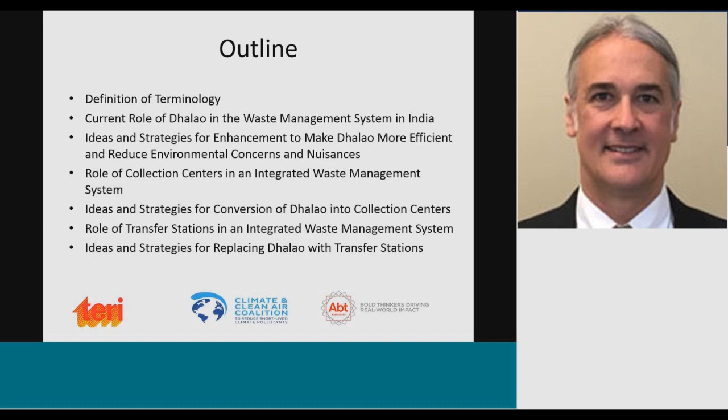I wanted to start by defining some terminology so we're all understanding how I'm using these terms today. A Dhalao is any form of a three-walled bay or bunker or building structure, typically constructed of concrete or block, and it's utilized for the collection and aggregation of solid waste from residential and commercial waste generators. Typically, the waste is tipped at the Dhalao manually by a municipal waste collector or cleaning staff, Safai Karamchari, and the Dhalaos are typically not equipped with any container.

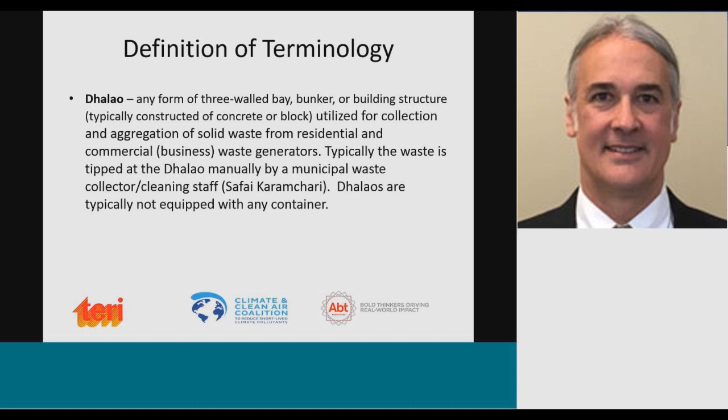A collection center is a facility established for collecting solid waste and recyclable materials from residents, and in some cases small businesses or institutions. This is a facility where individual residents can dispose of waste in bulk storage containers, and they're serviced by collection vehicles. A collection center typically does not allow commercial waste, and it does not have waste collection vehicles tipping waste there.

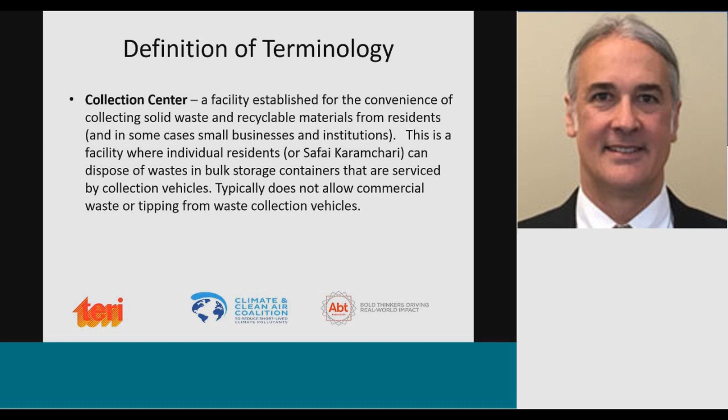And finally, to define a transfer station: it's any solid waste storage or collection facility at which the solid waste is transferred from collection vehicles to containers or larger long-haul vehicles for transportation to a central solid waste management facility for disposal, incineration, or resource recovery. Typically, transfer stations don't allow for manual tipping of waste, and they're not used by individual residents or businesses.

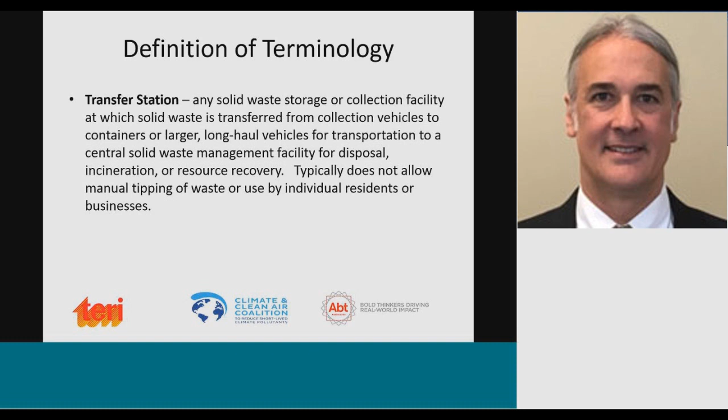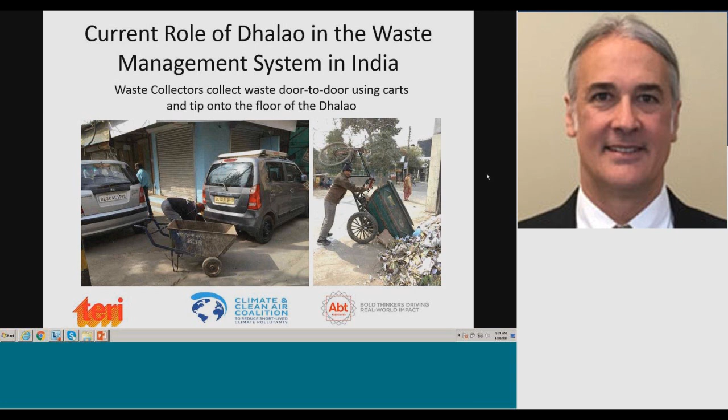The current role of the Dhalaos in the waste management system in India: waste collectors collect the waste door to door using carts of various shapes and sizes, and they tip onto the floor of the Dhalao. The waste is aggregated from local neighborhoods and surrounding communities, and the conditions at the Dhalaos involve tipping solid waste directly onto the floor within the Dhalao and in front of it for collection.

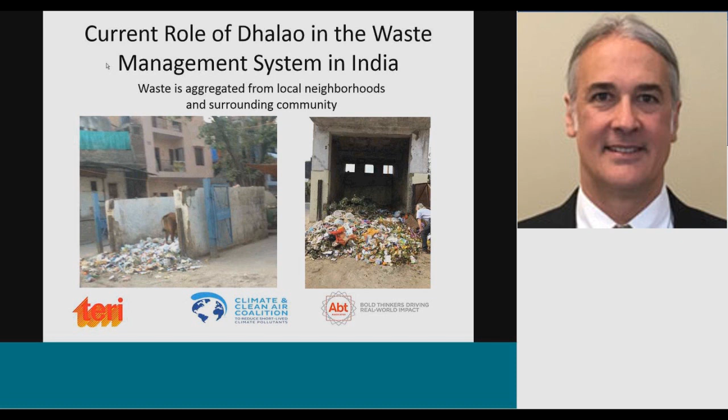Servicing the Dhalao requires a front loader and dump truck to extract the waste from the floor. This is an intensive process requiring multiple manpower and equipment to pick up the solid waste from within and surrounding the Dhalao by the front loader and place it into the truck for transport to the disposal facility.

The challenges with the current role of the Dhalao are inefficient handling of the waste multiple times. It generally has a relatively small storage capacity, and the waste is not containerized. It contributes to traffic congestion and unsafe conditions during servicing, and has to be serviced frequently throughout the day as the Safai Karamchari, the waste collectors, continue bringing waste to the Dhalao. There are nuisance concerns, odors, appearances, livestock and animals getting into the trash, and potential environmental and health concerns.

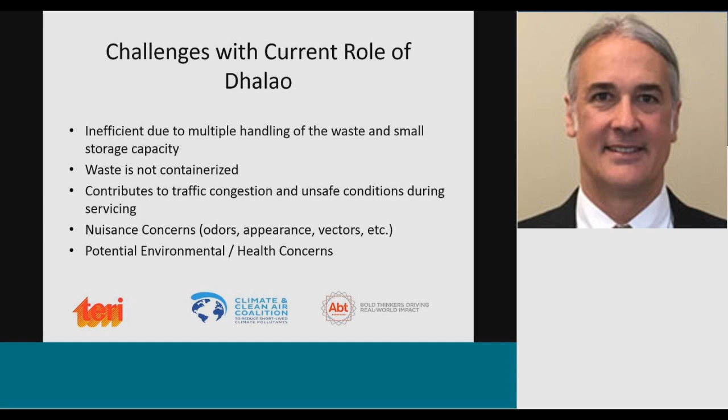Let's talk about a potential solution for enhancing the existing Dhalao structure. If you are limited to your existing Dhalao and cannot expand for another type of facility, one idea is to insert a roll-off container into the Dhalao. The Dhalao comes in many different shapes and sizes; sometimes they're covered, and most of the time they have at least 3 walls.

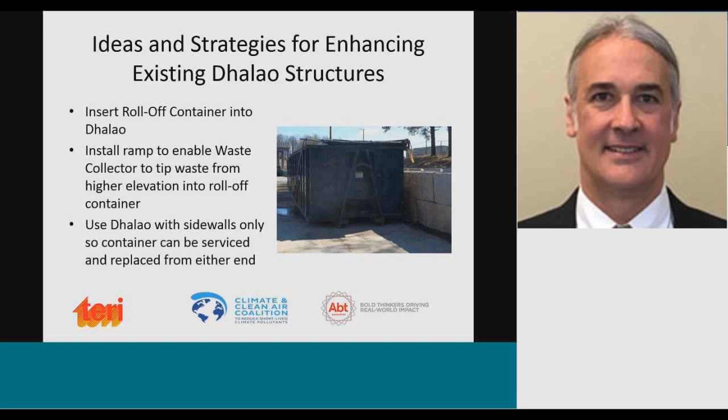Another idea is to install a ramp. In this photo, a block wall has been used to build up the elevation on the side of this container, and you can install a ramp to enable waste collectors to tip waste from their carts at a higher elevation into the roll-off container. You can use a Dhalao with sidewalls only so that containers can be serviced and replaced from either end. It's important to get the waste containerized in the Dhalao, which makes servicing more efficient because a roll-off truck can come and bring the container to the disposal facility and replace it with an empty one.

Along this same line of strategies, you can insert an actual compactor and associated container into the Dhalao. This requires electrical service to be provided, but it enables a more efficient operation. In this situation, the compactor is stationary, remains permanently at the Dhalao, and compacts the waste.

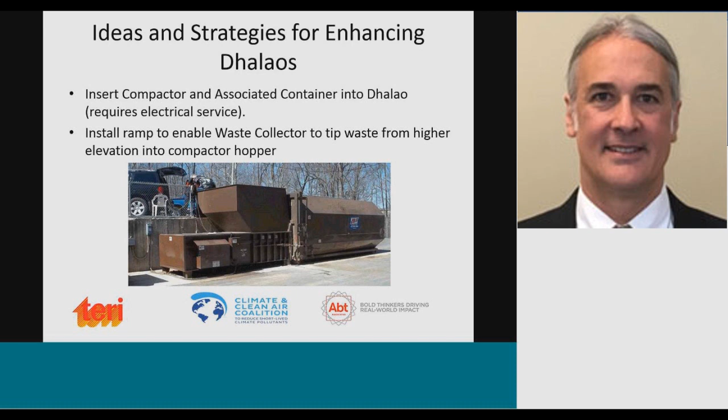This picture shows an example of a top-loading hopper, so you need a ramp to enable the waste collector, or perhaps individual residents and businesses, to place their waste from a higher elevation. If you cannot construct a ramp to achieve tipping into the hopper from a higher elevation, you can utilize an on-grade hopper for the compactor, so a retaining wall or any type of ramp is not necessary.

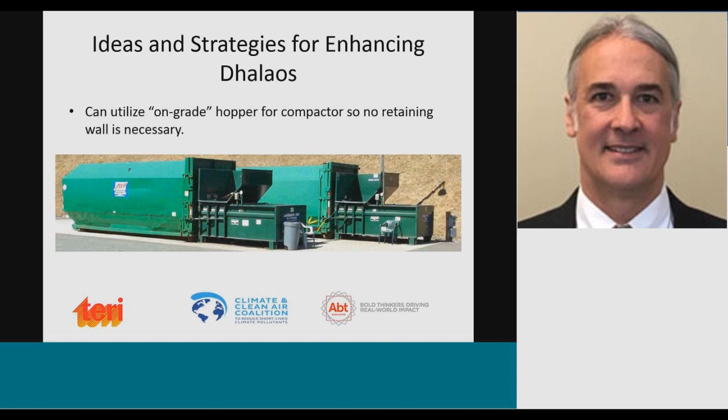I believe this improves waste collection efficiency from an enhanced Dhalao. It eliminates multiple handling of the waste and increases storage capacity to reduce the frequency of servicing. One of the primary goals achieved is that the waste is containerized early in the process of collecting and transporting it to the disposal facility. Clearly, you've reduced the manpower and equipment during servicing.

You no longer need a front end loader, and a single truck driver can operate the roll-off truck to remove and replace the containers or roll-off bins. You reduce traffic congestion and improve safety during servicing, and decrease nuisance concerns. The Dhalao doesn't have as much aesthetic problems, and it decreases potential environmental and health concerns. So that's a situation where if you are limited on space and must utilize the Dhalao, you can enhance it to make these improvements.

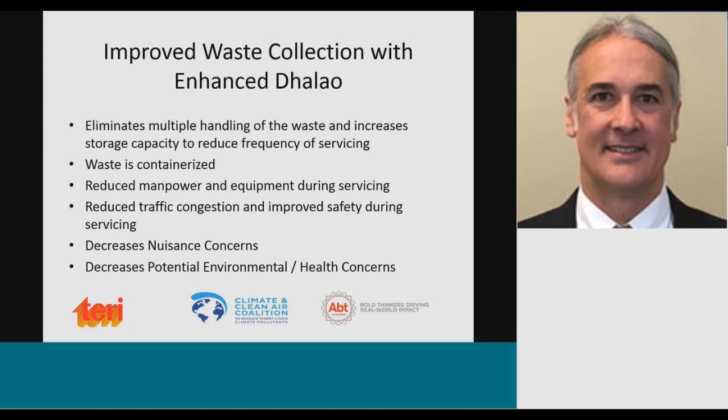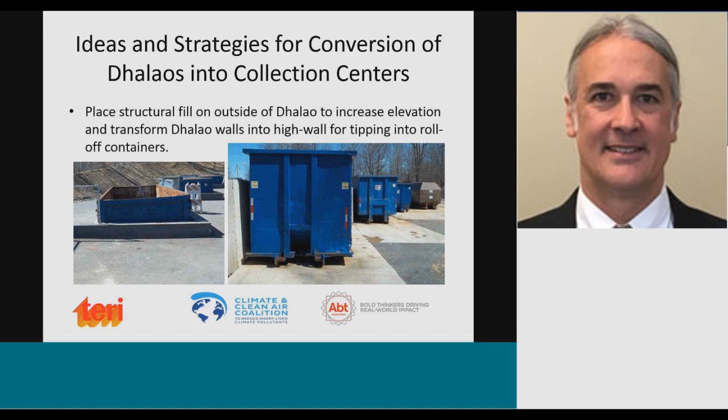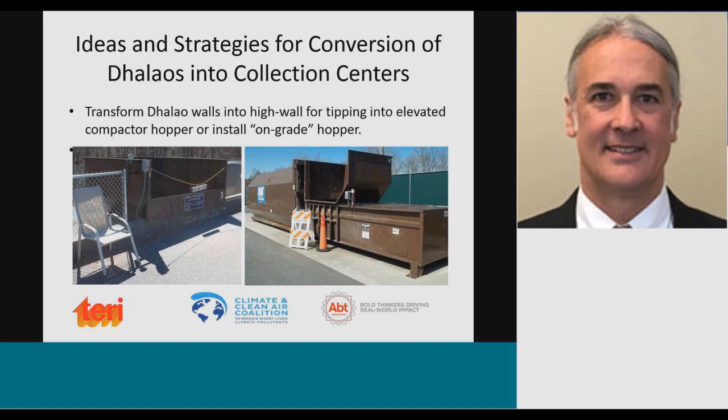Another benefit of the collection centers model is that you can introduce containers for recyclable materials where adequate space is available. I recognize, having observed many of these Dhalaos, that oftentimes there's not substantial space—they're positioned within the urban centers of cities and megacities. But anytime you can get a container allowing segregation of recyclable materials, it would be beneficial to divert these materials from going to the landfill or other disposal facility.

Ideally, the collection center site would measure about a quarter to half a hectare and would have electric service in order to utilize these compactors.

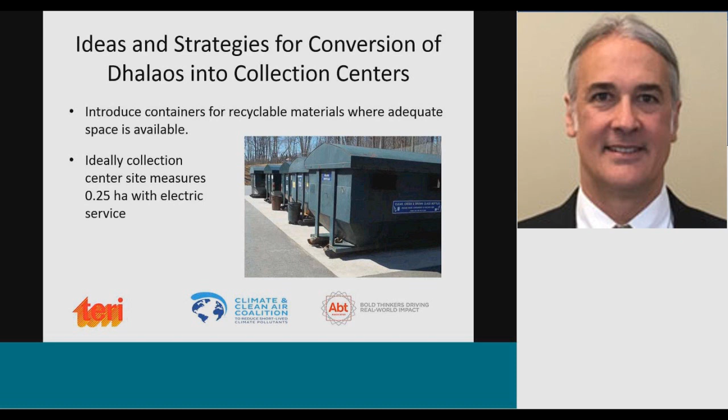The advantages of improving waste collection efficiency and introducing recycling with the collection center model are the same benefits as the enhanced Dhalao. It eliminates multiple handling of waste, which typically happens with the Dhalao type of structure, and it increases storage capacity to reduce the frequency of servicing. The waste is containerized—that's important. It reduces manpower and equipment during servicing, which doesn't happen as frequently. It eliminates nuisance concerns and potential environmental and health concerns, like runoff or releases of solid waste. And the collection center model allows for separation of recyclable materials.

Finally, let's talk a little about the role of transfer stations in the integrated waste management system. My definition of a transfer station is typically where you're transferring waste from either small containers or actual vehicles, the collection vehicles, to larger containers and vehicles, in order to make transportation more efficient with the largest vehicle possible.

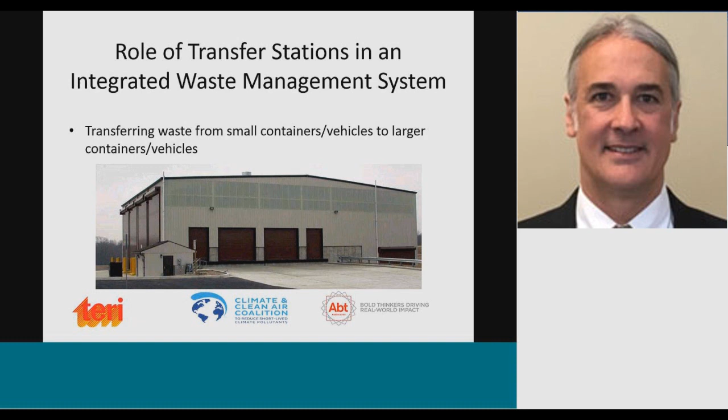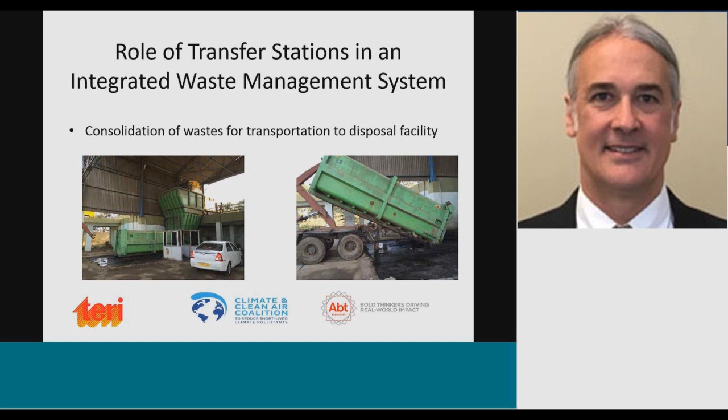Scientific transfer stations in India are being utilized in many communities, basically for the consolidation of waste for transportation to the disposal facility. Here you see a transfer station where the hopper is top loading, so there's an elevation difference where collection vehicles tip waste into a hopper and a compactor. On the left, the compactor container is in place and connected to the hopper. On the right, you see the roll-off truck servicing the container by removing it and transporting it to the disposal facility, where it'll be replaced with an empty container.

Another type of transfer station is where the tipping of waste actually happens within the transfer station building. This type of operation has push walls so that equipment, like a front end loader or backhoe type piece of equipment, takes the waste and places it in a transfer trailer. That transfer trailer is in a tunnel at a different elevation than the collection vehicles that tip waste onto the tipping floor, as you can see in this photo.

Some of the ideas and strategies for replacing the Dhalao with a scientific transfer station in your integrated waste management system. Obviously, transfer stations require more area. The site has to be larger than the very small footprint of the typical Dhalao. So one of the first things you have to do with this strategy is collect the waste from residential units and businesses in containers.

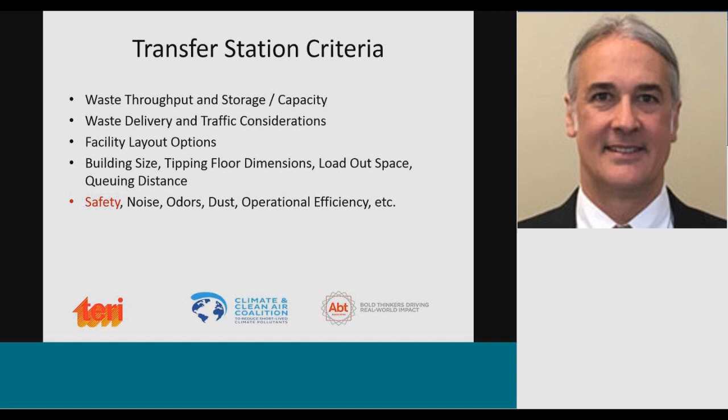Operational parameters of these facilities include safety, noise, odors, dust, and operational efficiency.

Some structural characteristics to consider are the tipping floor, your push walls, and the manner of design of the transfer trailer tunnel. Transfer stations can use a partial tunnel, in which the front end loader has to reach up and place the waste into the top, or a full tunnel depth, where it's more efficient for just pushing the waste in. This depends on your site-specific design parameters.

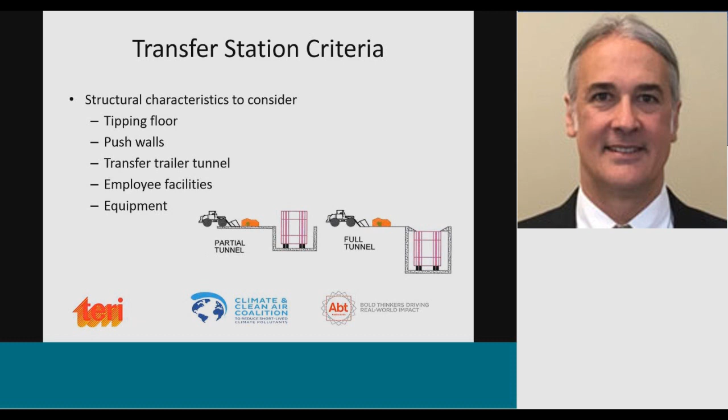Some transfer station design goals we typically attempt to achieve include counterclockwise traffic flow, one-way traffic movements. You want to minimize cross traffic, and you want to segregate your commercial haulers from self haulers that are coming with smaller loads of waste.

If you can separate the large vehicles from the small ones early on in the facility, that works better. You need to accommodate for vehicle staging, have your site amenities, and at all times be thinking about safety and efficiency.

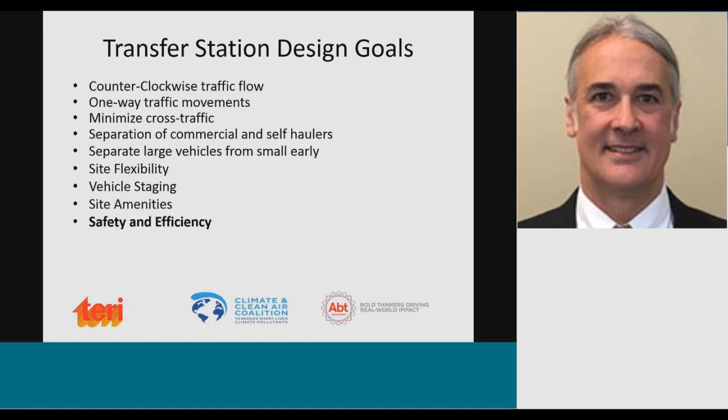In a typical transfer station design, the collection vehicles with containers or the rear loaders are brought in on this path in order to tip the waste onto the tipping floor inside the transfer station.

The vehicles that service the containers and remove the waste from the facility are on a separate roadway, a different path. Then you have space for additional trailers or containers to be placed and stored on the site, and adequate parking for vehicles bringing the waste in.

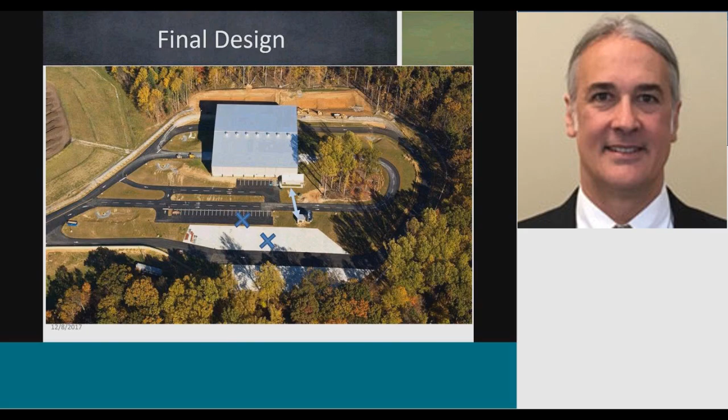Good afternoon, it's a pleasure to be here. I've tried to make it in a simple manner, although apparently it appears to be very simple. But if you actually have to do this, it's going to be a very, very difficult task. In our actual situation, because we have a lot of congestion in our cities, road access is also a difficult issue.

So let me move on with my presentation. I've tried to describe the actual situation here and what should have been as per our rules — what is the ground reality for the Dhalaos or collection centers vis-à-vis the transfer station, which even now is a very loosely termed topic, because we have very few properly designed, so-called modern transfer stations. There are others called transfer stations, but if you go there, you will find it's only an open field where the thing is actually being done.

Coming to my presentation, ideally solid waste should be collected from the point of generation in three different streams, as per our rules, and taken to the respective processing, recycling, or disposal site, excluding construction and demolition waste. This is as per the Solid Waste Management Rules 2016, notified by our Ministry of Environment, Forest and Climate Change last year.

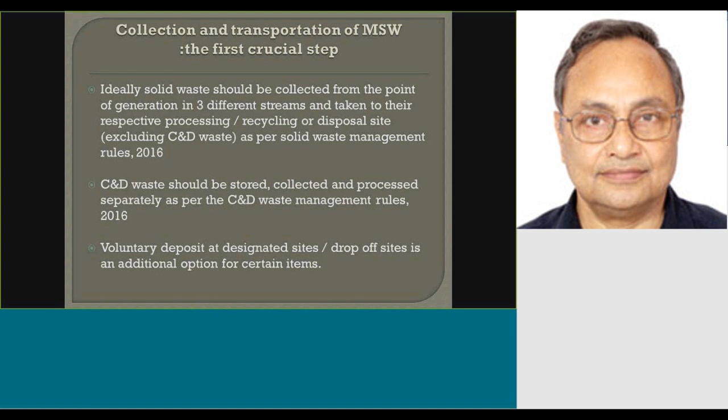Voluntary deposit at designated sites or drop-off sites is an additional option for certain items. This is what should be done ideally, with respect to Indian towns and cities. Now what is the reality? What actually happens at most places is quite different, and often not efficient or desirable.

Mixed waste is thrown or deposited in and around municipal bins at best, or thrown inside a drain at its worst. So you can imagine, if it is thrown inside a bin, we think that is the best option as such. That's the kind of scenario that we have.

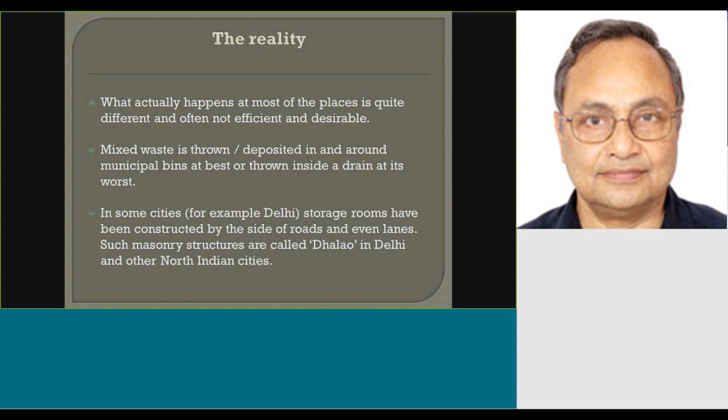Now in some cities, for example Delhi, storage rooms have been constructed by the side of roads and even lanes. Such masonry structures are called Dhalao in Delhi and other North Indian cities. That has become a very common term in this part of the country. The Dhalao, or intermediate neighborhood storage facility, is a common feature of municipal solid waste storage and secondary collection. This is a very common thing ingrained in our waste management life as such.

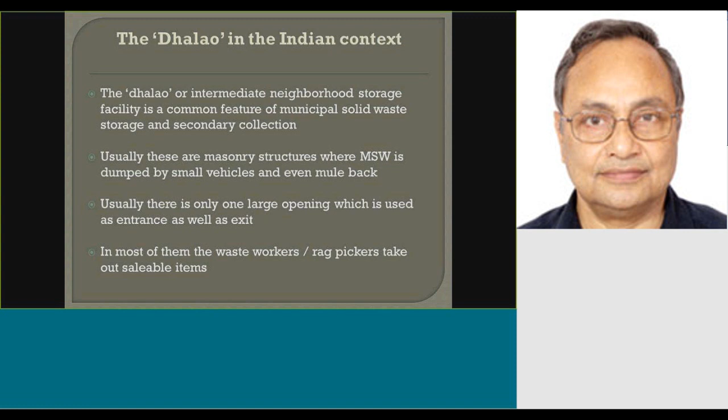In most of them, the waste workers or rag pickers take out the saleable items, depending on what they deal with, taking their share. And the remaining waste matter is picked up by the municipal vehicles and carried to the processing or disposal facility.

In most cases, this is the dump site. In some cases, the material is taken to an intermediate transfer station, which may even be an open ground, as I was just mentioning. Thus, the Dhalao also represents a case of multiple handling of waste.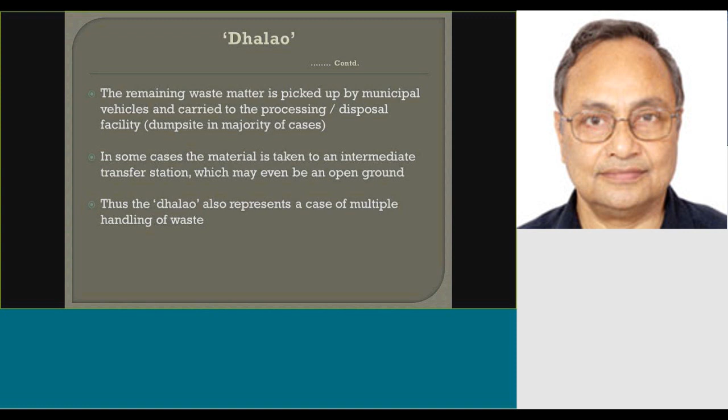Now, just to give a glimpse of the primary collection and some transfer options, very shortly and briefly. This is how a transfer truck, a small truck, very small - this I think is a Tata, the 600 or something, the small one. So this is very much in use for primary collection.

And then you can see the bags which are just jutting out or hanged from the side, containing different recyclable items, or rather saleable items. So this is how it is normally done, in most of the cases, the collection from the doorstep.

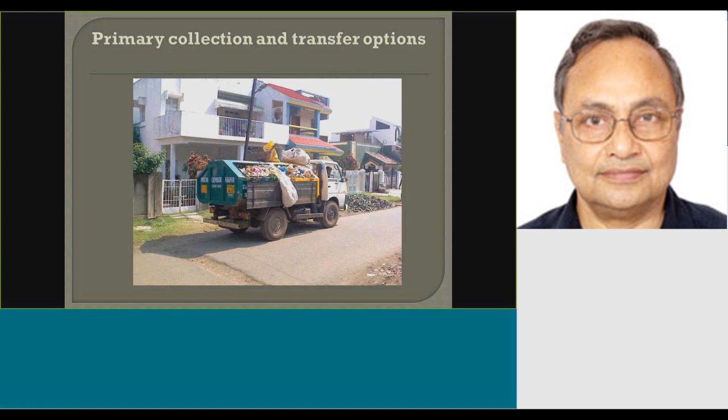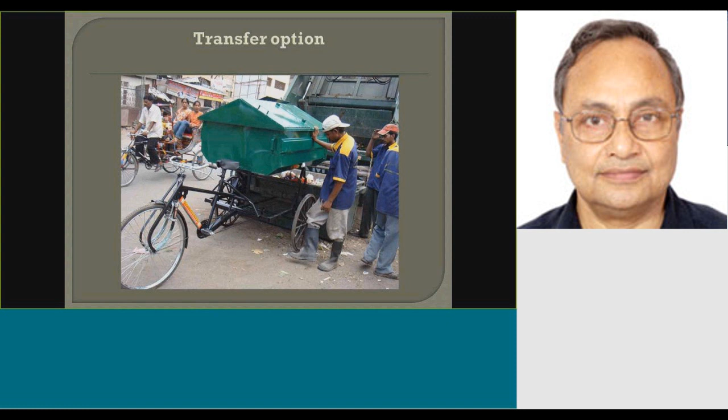Now the municipal solid waste transfer station - this is an intermediate place where solid waste collected by small vehicles is transferred to larger vehicles for ease of transport of large quantities through long distances. This arrangement has a potential to make the system faster as well as more economical, because larger vehicles take more waste and road congestion is also impacted positively.

In most of our congested localities or wards, it is not possible to bring even small motorized vehicles. So from that context also, the transfer station has a role to play. The doorstep collection is done by three-wheel vehicles, small four-wheel vehicles, or even small hand-drawn carts.

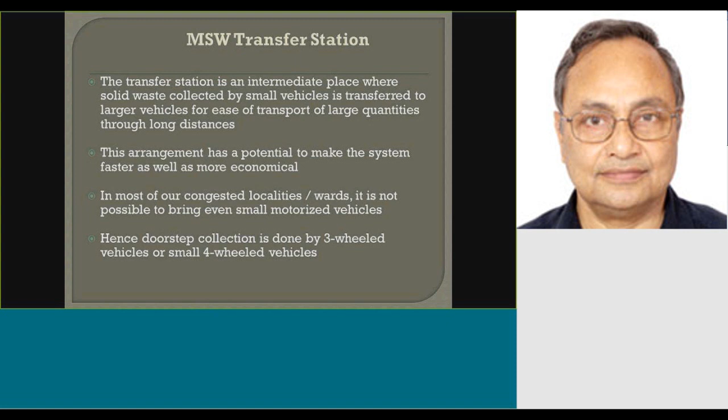These vehicles deposit waste at the transfer station. Larger vehicles and bulk carriers pick up the waste and move it to longer distances. Typically, we normally try to do it for more than 15 kilometers, looking at the economic side of the project.

Now, transfer stations can be of different types, as mentioned in later slides. But in India, even an open space where the waste is dumped, kept for some time, and then sent by larger vehicles is often called a transfer station. And personally, I have seen that possibly they are the largest in number - or if you take the percentage, possibly they are the largest percentage of transfer stations, just open fields.

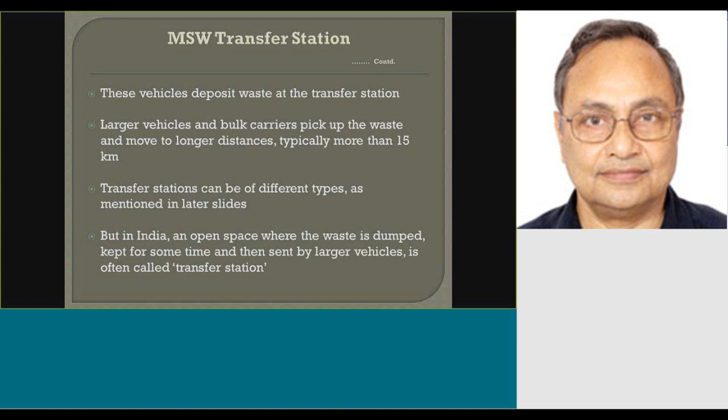Normally, large modern transfer stations are designed as split-level facilities, as Mr. Dick has also shown. A ramp leads smaller vehicles up to the unloading points from where waste is deposited into larger vehicles or bins through hoppers. Modern transfer stations are equipped with stationary compactors so that more waste can be packed into the receiving bin or vehicle.

The total area required is quite large. Typically, for about 500 tons, one would require anywhere between 0.3 to 0.5 hectare. That's a pretty large chunk of site inside a city, and outside the city also we have transport issues.

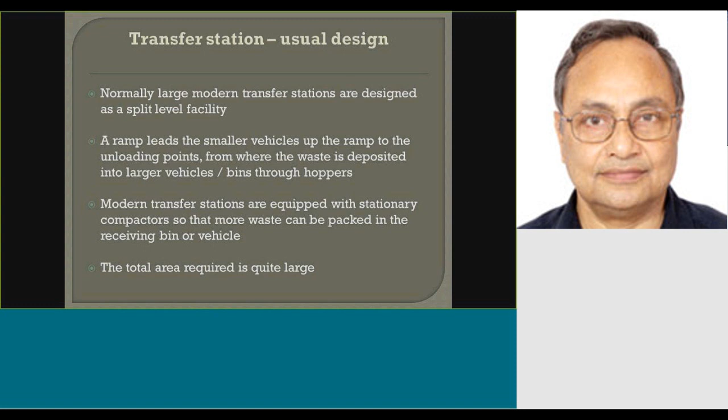So this appears to be a simple system, but there are issues. First, you have to find so much land. Secondly, the construction is pretty expensive because a lot of civil construction is involved. The electrical power requirement is comparatively less, replaced by more automobile fuel, diesel in most cases. So the construction cost is quite high.

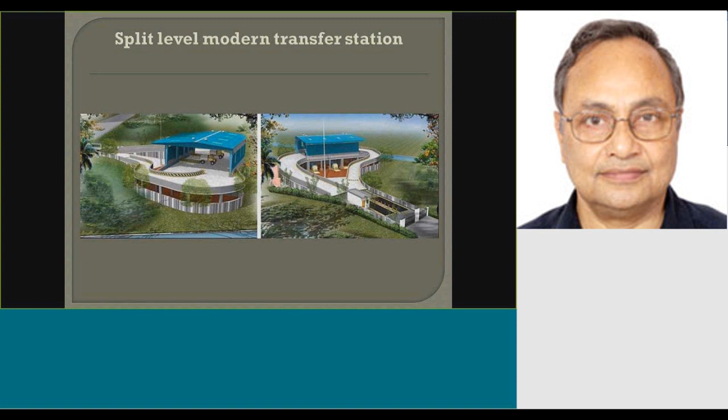Now another variation, this in the Indian context, is a compact transfer station. I have coined this term, compact transfer station - normally this is not there, but we built it. We built a system at Nagpur, in the city of Nagpur. This compact transfer station was designed and implemented there.

At the designated site, a transfer station of 100 ton per day capacity was required, but the available site was only 850 square meters. At the back of it was a huge water reservoir, and on the other side was a place for a weekly market. So this was a very constrained kind of site.

First, efforts were made to design a split-level transfer station using a concrete ramp, but the site was quite inadequate to accommodate the ramp with a certain gradient. You cannot go beyond a gradient of, let's say, 14 or 15 degrees, because then the vehicles would start slipping back. And at least two large vehicles were needed for further carriage - one empty would come in and the other filled one would drive out, so there should be space for at least two vehicles. This was not possible within this site.

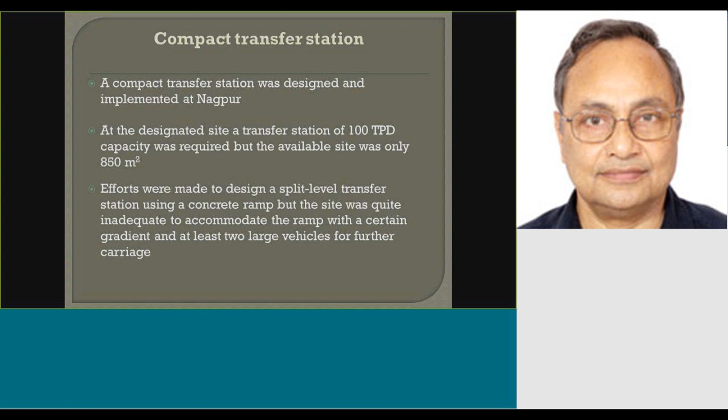So after a lot of brainstorming, we eventually planned to design a single level transfer station equipped with a powerful static compactor with a large hopper and a set of sturdy compaction bins, each with a capacity of about 18 cubic meters. A conveyor was designed to carry the material from a ground level receptacle to the top of the hopper. The material sliding down the hopper was pushed inside the bin while being forcefully compacted. These equipment are available, but this particular design was done there.

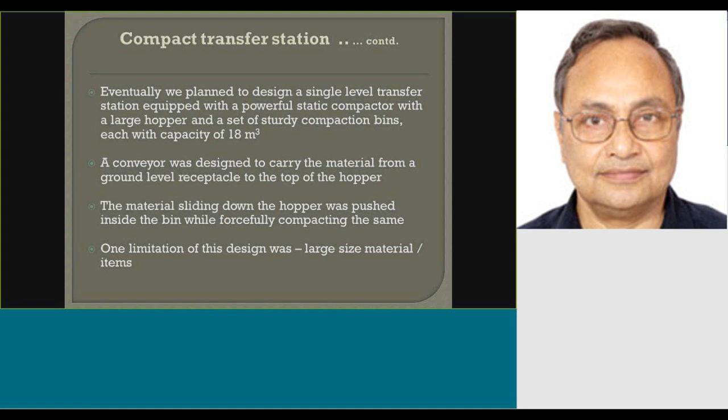One limitation we found was with large size materials or large items - they were difficult to handle with this kind of system because the conveyor belt had a certain width, and the materials had to fit and then go into the hopper and shoot out at the bottom. So all that constrained the size of material that could be handled.

This is the place when it was under construction. You can see the hopper in the foreground, the conveyor at the back, and the static compactor behind it. On the right hand side is the bin, and on the far right is the hook loader used to pick up the bins.

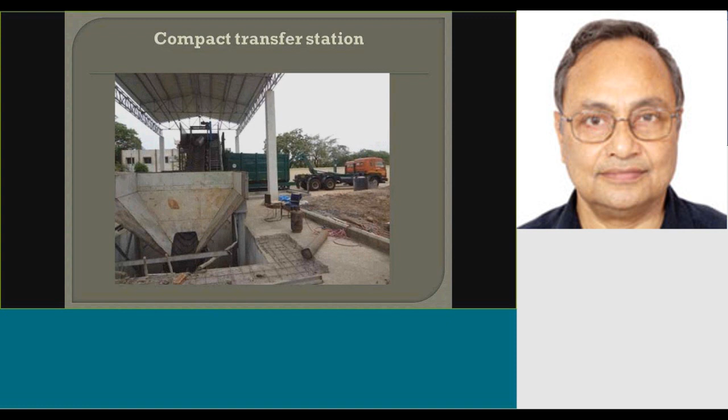This is after it was constructed, so you can see the conveyor belt, the static compactor, and the compactor bins. These bins are very, very sturdy.

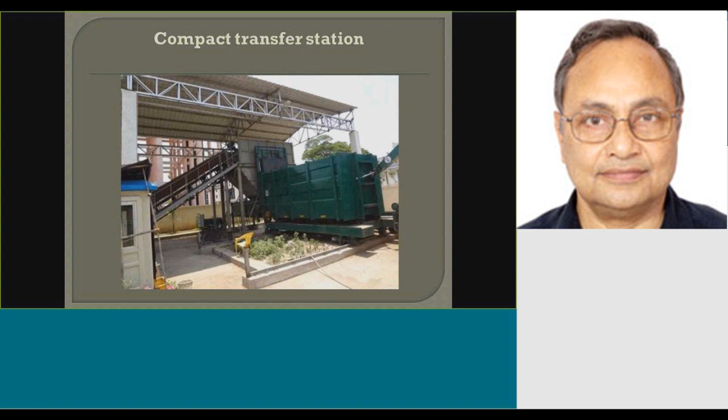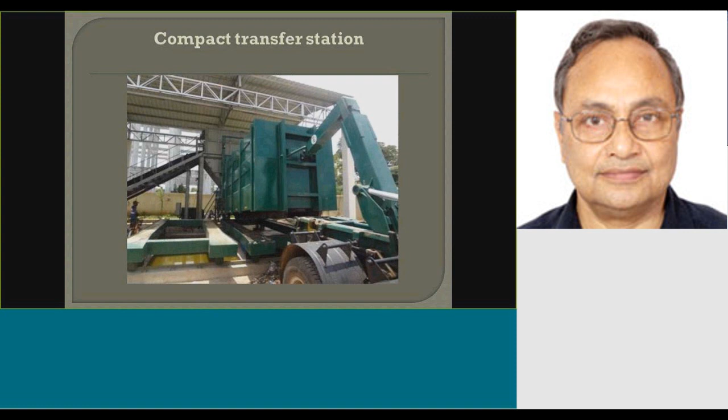Now the hook loader arm is picking up this compacted bin filled with waste, drawing it towards itself. We have two rails there - one on the right-hand side where this bin was, and on the left-hand side another empty one should have been there, but we hadn't put it there because I wanted to take this photograph. Otherwise, these two bins are always present - one getting filled while the other empty one is parked there. So this worked pretty well.

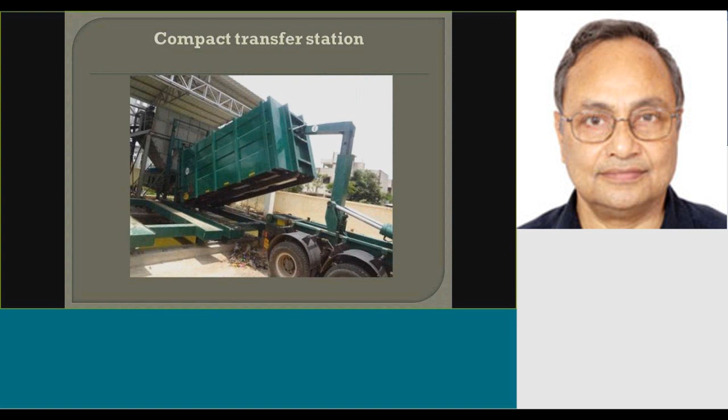The only limitation was that large size materials and very light materials like plastic sheets also come through. Large sheets of plastic just jumble up, so they sometimes create difficulty on the conveyor belt. Normal material with a density of 0.4 to 0.6, 0.7, they behave very, very nicely.

Now the other one, which Mr. Dick had also mentioned and shown, is the portable compactor. In this case, the compactor is part of the bin. The motive force is supplied by an electrical connection, and there is a loading bucket which can be lowered onto the floor or road level. This bucket receives waste carried by wheelbarrow or small vehicles, and then the bucket is pulled up by a lever and the waste is deposited inside the bin.

The compactor inside the bin keeps on compressing and compacting the waste, and more waste is deposited. It's an ongoing process and the sequence goes on. These bins have strong steel wheels on one side so that they can be pulled up just like a roll-on, roll-off, and then a hook loader pulls up the whole bin along with the compactor and carries it away.

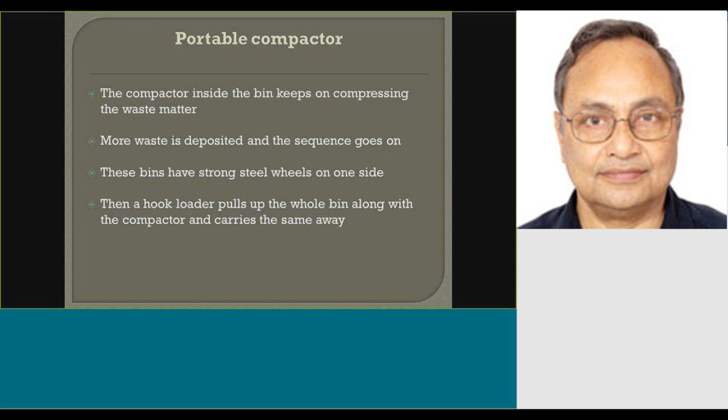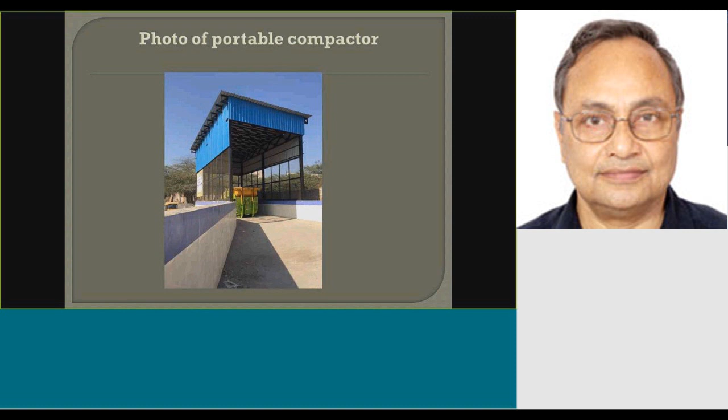This is actually the compactor bin. The yellow portion is the front-end bin, which is lowered onto the ground, and then the small vehicles deposit or tip the waste into that bucket. As soon as it is nearly filled, the bucket moves up and deposits the waste inside the bin, and then the compactor moves on and the bucket comes back. This sequence goes on as such.

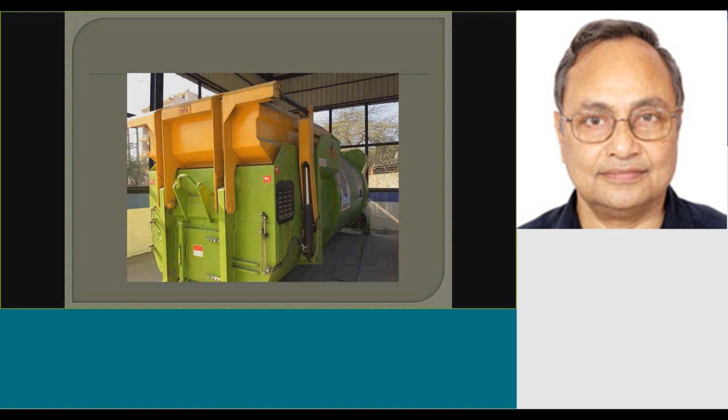Now, the issue of converting a Dhalao to a transfer station. A Dhalao is much smaller in footprint and size than a transfer station. Some transfer stations have segregation facilities apart from the role of shifting waste from smaller to larger vehicles. Of course, these take a lot of space, typically 0.5 to 1 hectare. That kind of land is extremely difficult to find inside a city or even in the periphery, because one has to see the logistic factors as to where to put the transfer station so that it is techno-economically viable.

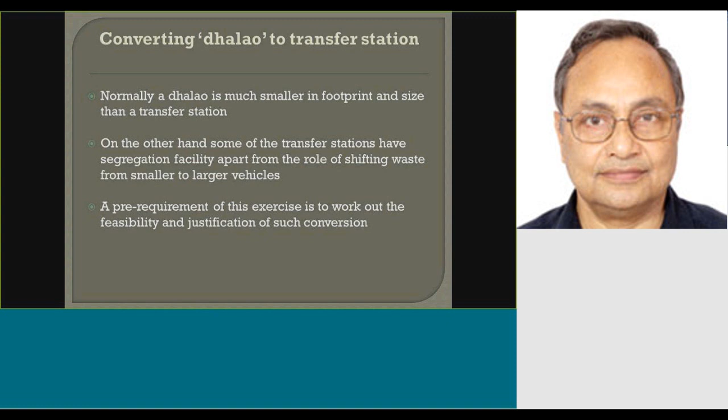A pre-requirement of this exercise is to work out the feasibility and justification of such conversion of the Dhalao into a transfer station. This will depend on the area available—which is the most important thing—neighborhood population, population density, road access and width of road, and further destination of the shifted material. Apart from the site, road access is extremely important here.

While planning such a facility, this is very, very difficult—we have actually faced this while doing such work in a number of cities. Dialogue with the neighborhood and interactive planning is very important for success, and this is extremely difficult, because to talk to people, to have a dialogue and bring them to your side, to convince them that this is going to improve their situation, is very, very difficult. More so because we don't have a good history of such things, which makes it harder to convince people.

Finally, the life cycle cost needs to be looked into to take the decision, and the ULB has to initiate this. Every Dhalao cannot be converted into a transfer station—this workout has to be done meticulously. Personally, I would feel one should start only with samples, say 1 or 2, see the result and feedback after conversion, and then step up the conversion process.

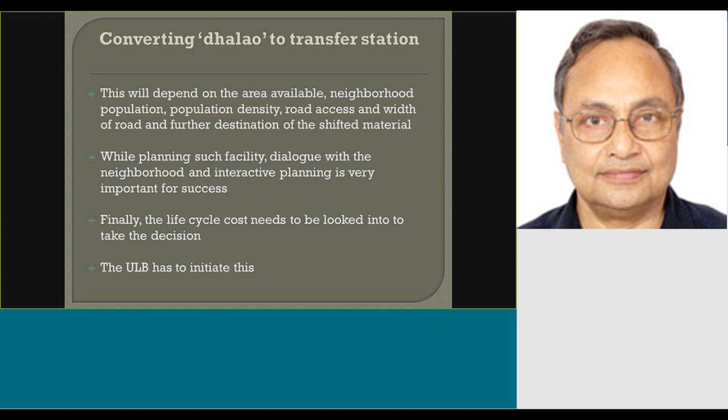And of course, if you look at the distances—the small vehicle distance and the large vehicle distance onward from the transfer station—then you have to see where exactly a transfer station can be justified. So those are very important issues as such.